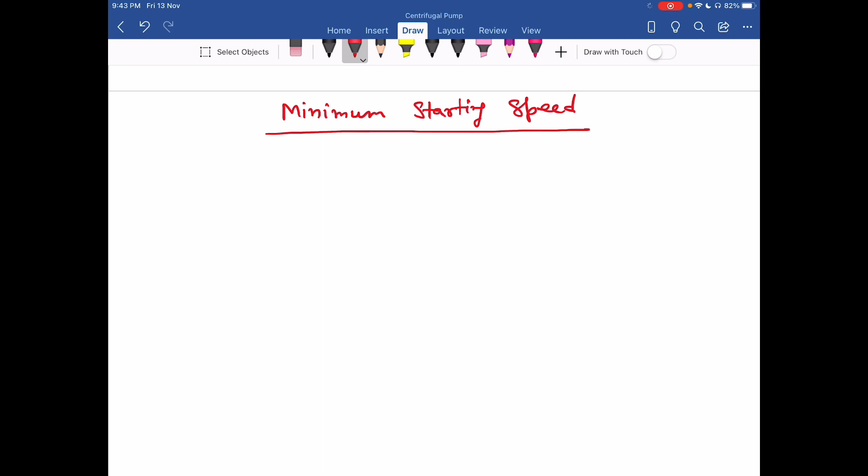Now, as a pump is started, it does not deliver water until enough head is developed to raise the water to the desired height. So, according to Euler's equation, the energy transfer per unit mass we can write as Euler's head, that is the energy transfer per unit weight.

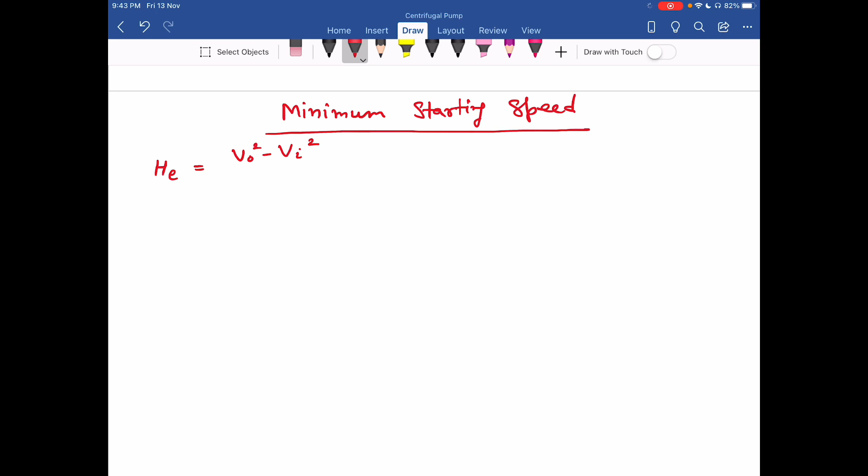So we can write it as VO square minus VI square divided by 2G, plus UO square minus UI square divided by 2G, plus VRI square minus VRO square divided by 2G.

Now, till the pump starts delivering water, there is no flow from the eye towards the periphery. So at that time, when we start the pump, the velocities of flow, the fluid velocities are zero. Only the centrifugal head is applied on the liquid. So the flow will start as soon as that centrifugal head developed becomes equal to the total head.

So now when we start the pump, there are no velocities, meaning this head is not there, this head is not there. Only the centrifugal head is available. So when we start the pump, the Euler head developed is only UO square minus UI square divided by 2G.

So the minimum head required, if it is H, then I can write this UO square minus UI square divided by 2G equal to H upon hydraulic efficiency.

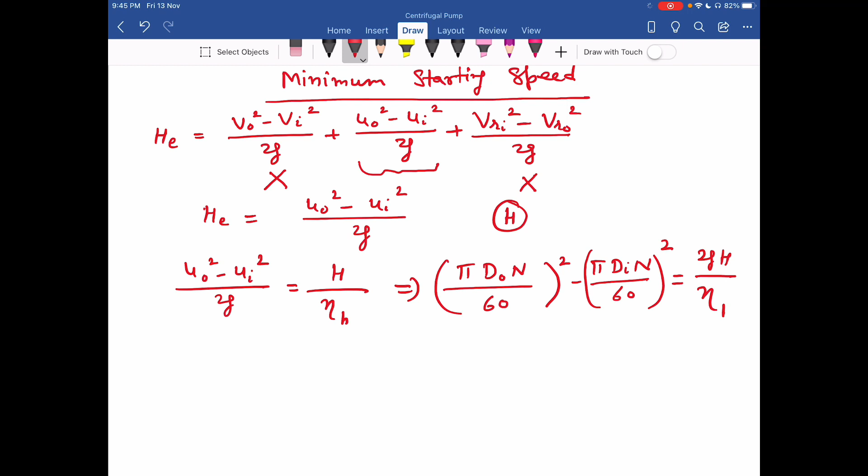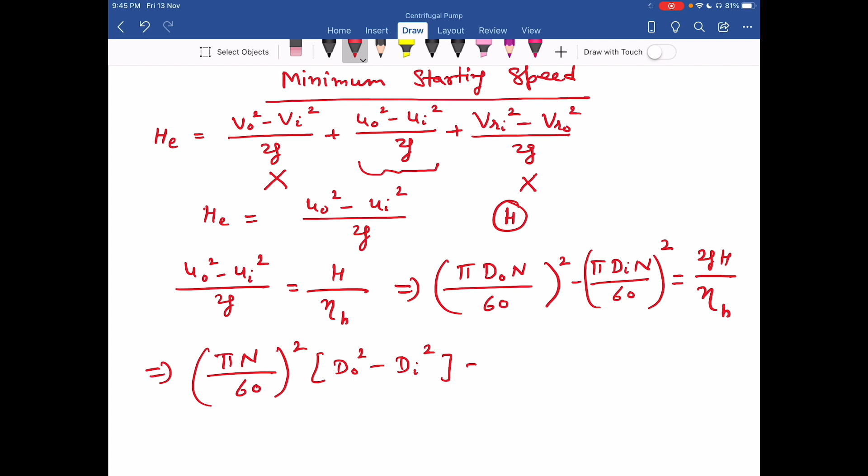Now further from here I can write pi n upon 60 square into dO square minus DI square equal to 2GH divided by hydraulic efficiency.

Now further from this formula I can write N minimum, that is the minimum speed of the pump to develop a head H, that is equal to 60 divided by pi, times square root of 2GH divided by hydraulic efficiency into dO square minus DI square.

Now this term is under root. So this is my formula to develop a minimum head of H with a minimum speed Nmin. So this is the formula for minimum starting speed to develop a head H.

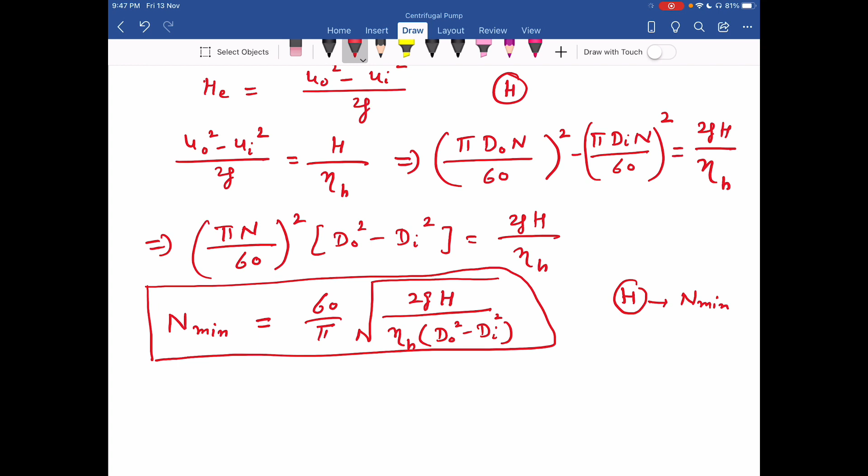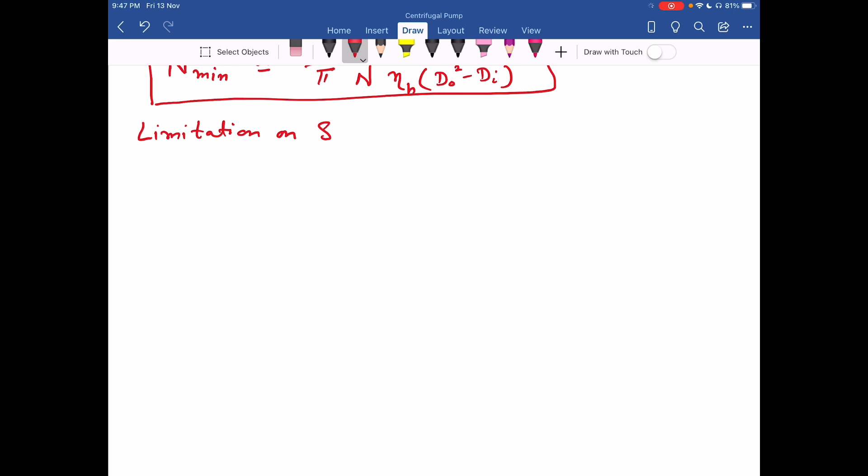Then next is the limitation on suction lift.

Now the suction or negative pressure is developed at the inlet of the centrifugal pump, that is at the eye of the impeller. So this suction pressure or negative pressure depends upon the height of the pump above the sump level. This is similar to the draft tube of a reaction turbine.

So when this absolute pressure is reduced to a value equal to the vapor pressure of the liquid, that is water, at room temperature, the water starts evaporating. The bubbles start forming.

So when these bubbles reach the region of high pressure, they collapse over there and a vacuum is created. When they collapse at a certain location, a high pressure wave is created, which strikes the surface of the vanes or the casing, producing pits or cavities on the vanes. So this whole process is called cavitation.

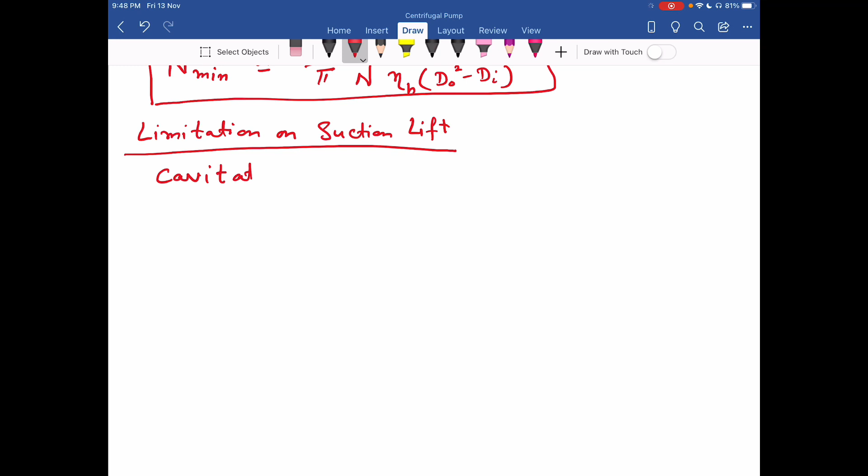This is called cavitation. Now we have to avoid this cavitation in the centrifugal pump. Therefore, it is necessary that the pump is fitted at such a height that the absolute pressure or negative pressure at the eye of the impeller does not fall below the vapor pressure of the liquid.

So at the eye of the impeller, the pressure should be more than the vapor pressure of the liquid. At the least, it should be equal to the vapor pressure of the liquid.

So that is the maximum value of suction lift we can find out.

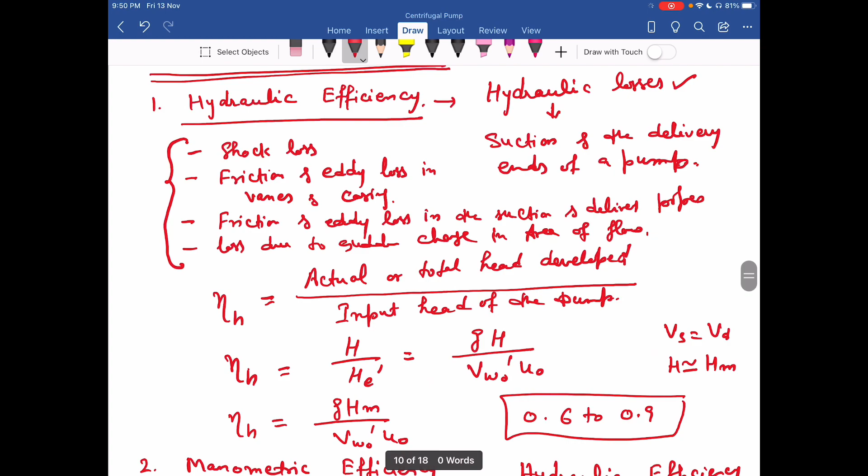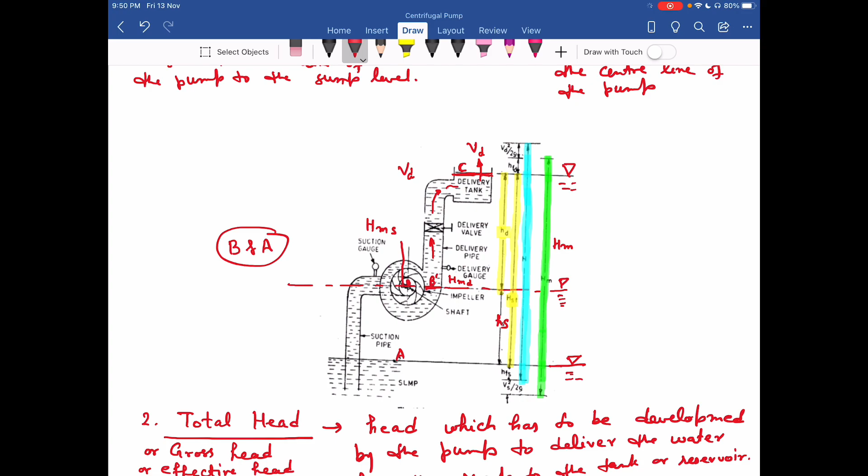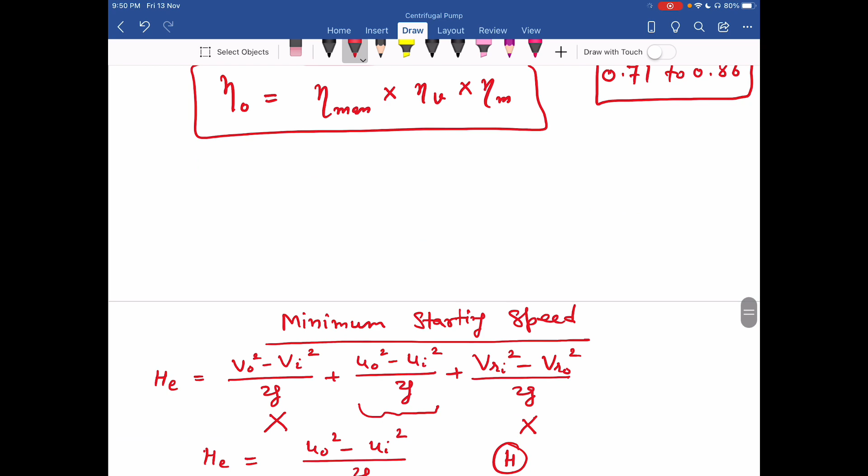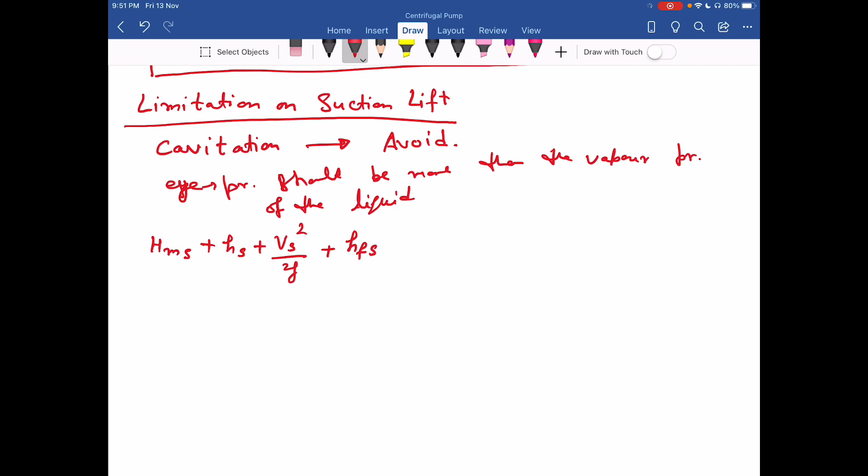So now if I try to apply Bernoulli's theorem at these two sections, at section B I can write the pressure head, that is HMS plus HS plus Vs square divided by 2G plus the frictional loss in the suction pipe. This is equal to PA divided by W or rho G plus the elevation head, that is the datum, plus the velocity head, that is 0.

Now this HMS I can write as pressure on suction side divided by W. Now this value of PS should not fall below the vapor pressure of water, that is PV.

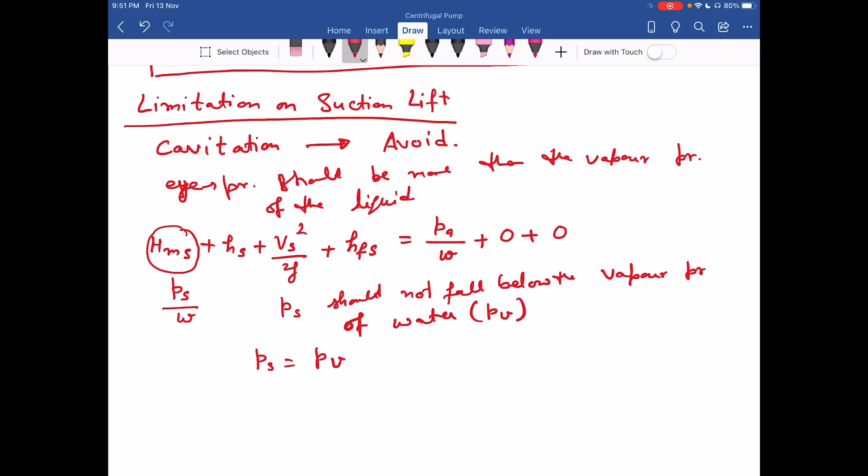So at the least this value should be equal to PV. So now I put this value of PS over here, so I can write PV divided by W plus HS plus Vs square divided by 2G plus HFS equal to PA divided by rho G.

So from here I can find out HS, that is equal to PA divided by rho G or W, minus PV divided by rho G, minus Vs square divided by 2G, minus HFS. These two signs are minus.

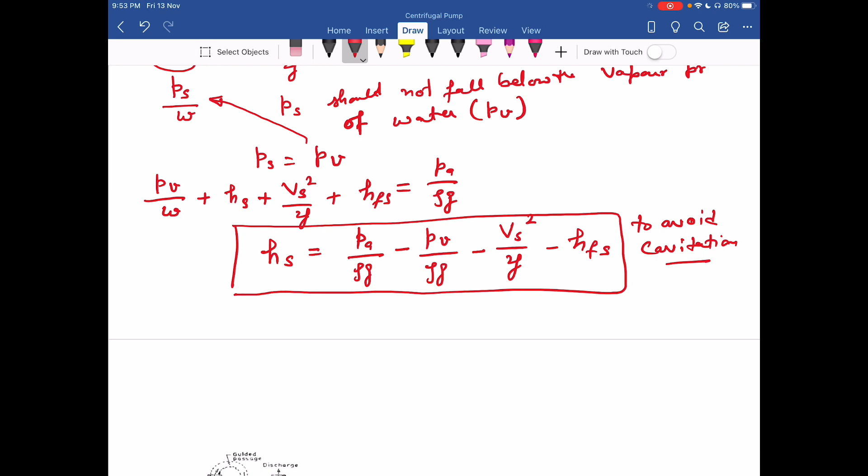Okay, so the suction height should not be more than this value of HS. I repeat it again: the suction height should not be more than this value of HS to avoid cavitation. At or above this value of HS, there is a problem of cavitation in the centrifugal pump. So this is the maximum value of HS to avoid cavitation. That puts the limitation on suction lift, that is the suction head. This is how we can decide the suction lift, or the suction head, you can say.

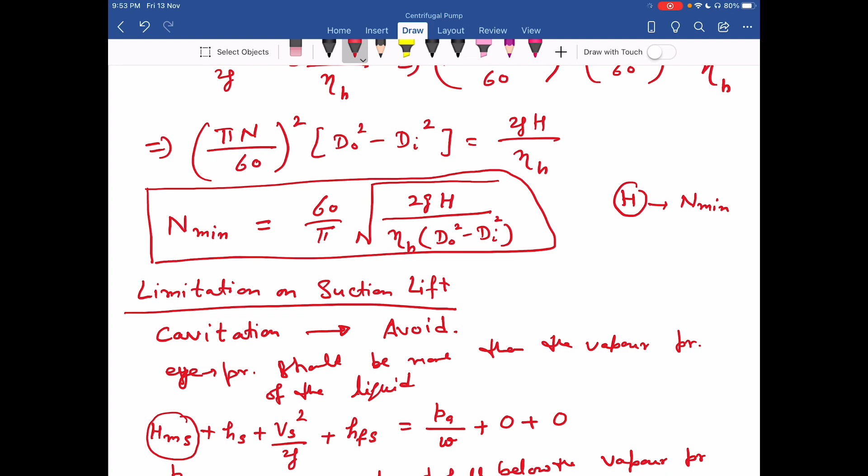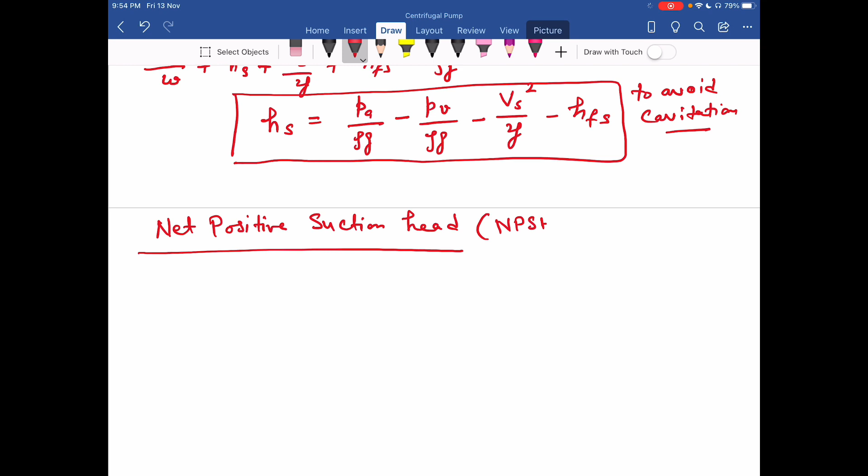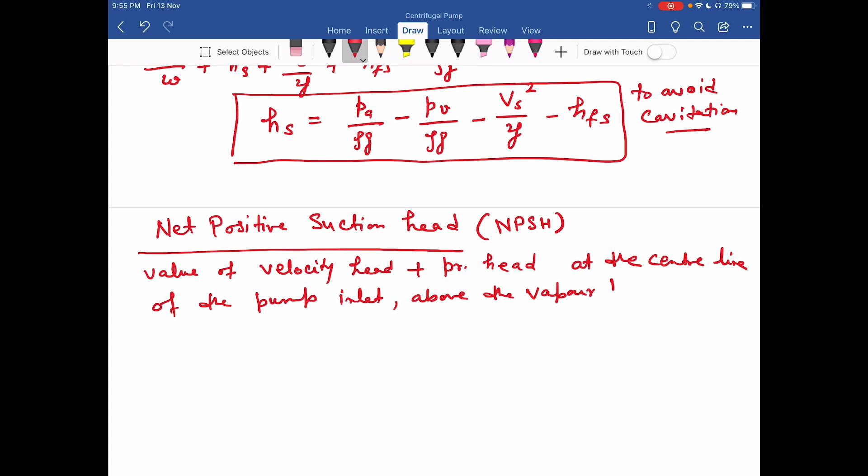Net positive suction head, that is NPSH. The net positive suction head is defined as the value of velocity head plus the pressure head at the center line of the pump inlet above the vapor pressure head of the liquid. So NPSH is the value of velocity head plus pressure head above the vapor pressure head of the liquid.

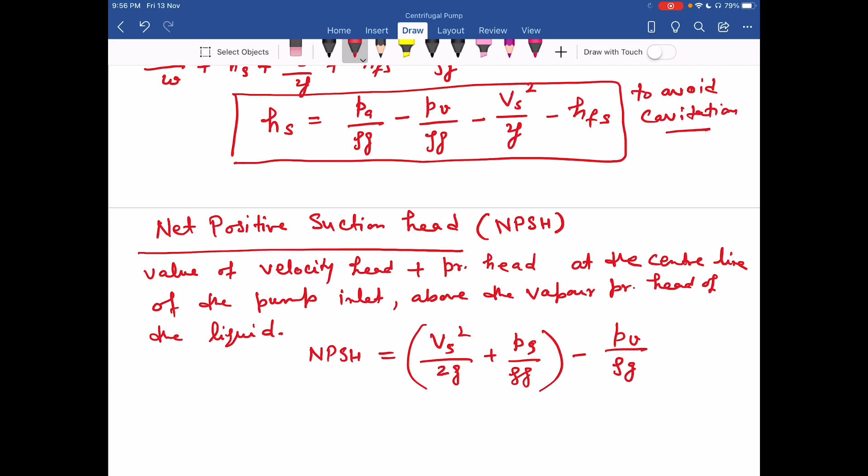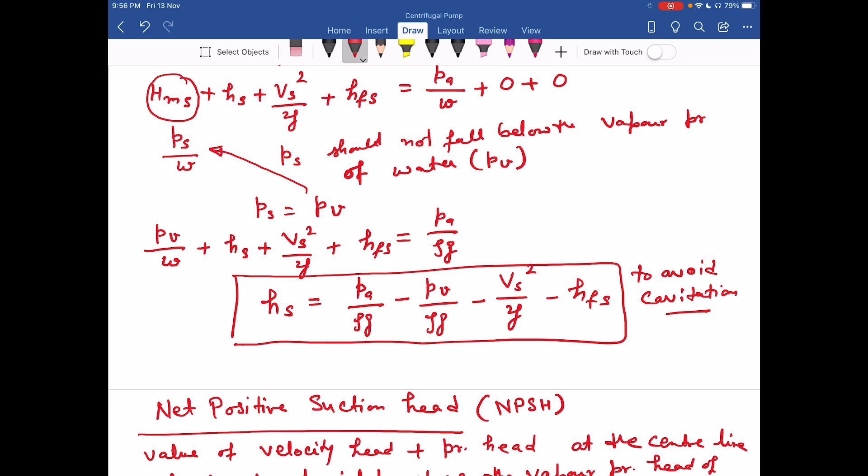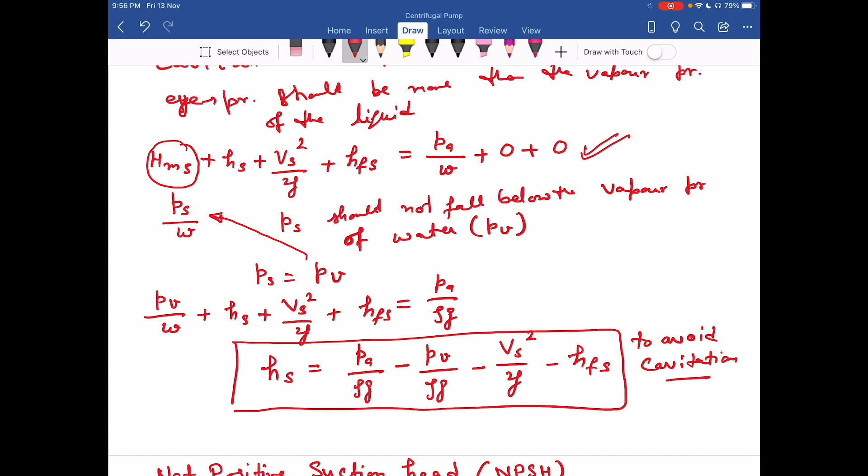Now I can write this as NPSH equal to Vs square divided by 2g plus Ps divided by rho g minus Pv divided by rho g. So this difference is NPSH. Now you can also see from the above equation that from this equation I can write Ps by W, that is rho g, equal to Pa by W minus Hs minus Vs square divided by 2g minus Hfs. So Ps divided by rho g is equal to Pa divided by rho g minus Hs minus Vs square divided by 2g minus Hfs.

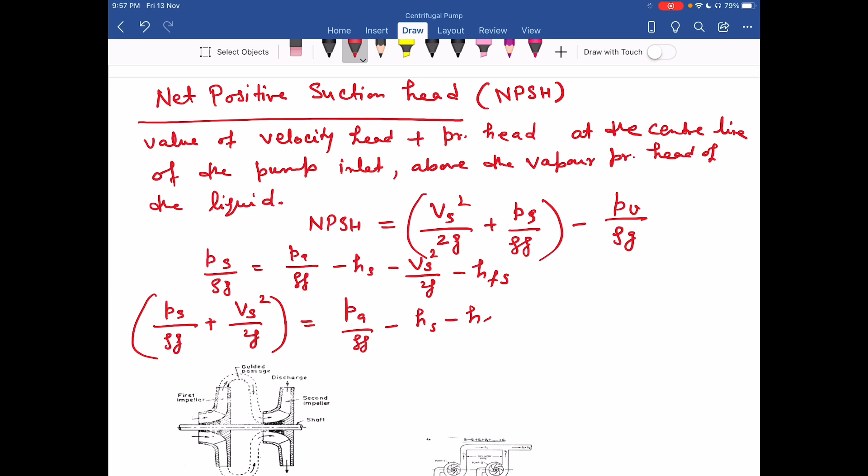Now from here you can find out Ps divided by rho g plus Vs square divided by 2g equal to Pa by rho g minus Hs minus Hfs. Now you subtract Pv by rho g from both sides. So I can write Ps divided by rho g plus Vs square divided by 2g minus Pv by rho g equal to Pa by rho g minus Hs minus Hfs minus Pv by rho g. So this term is my NPSH. This is another formula for net positive suction head.

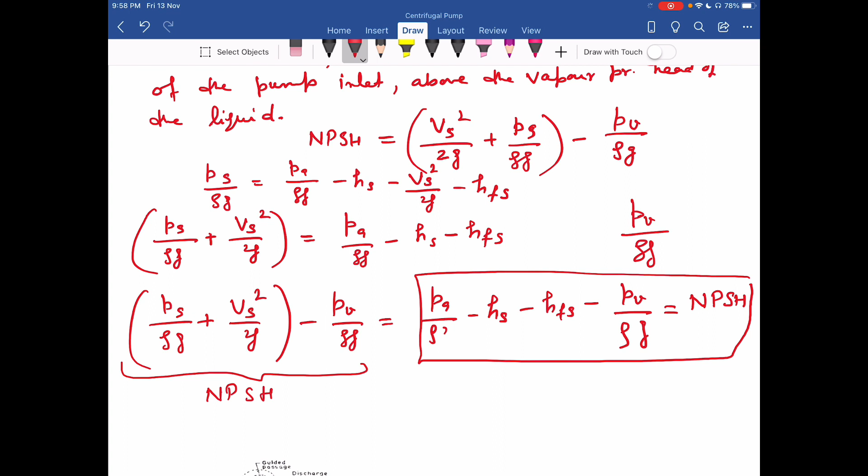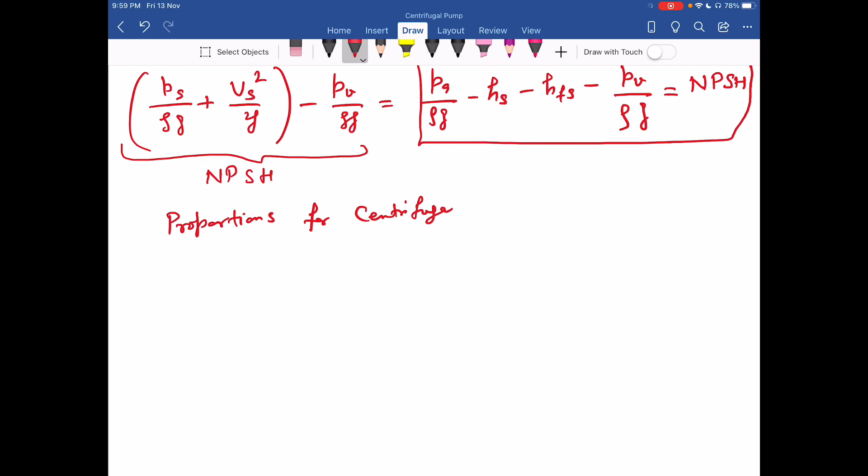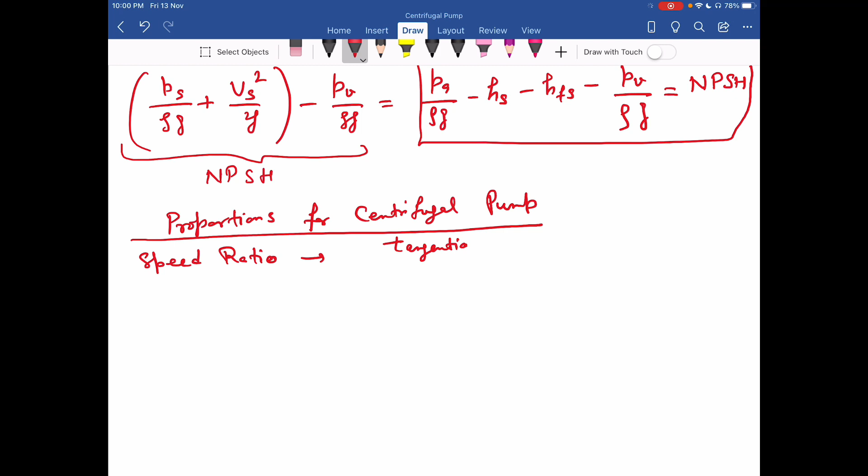Proportions for centrifugal pump. So first is the speed ratio. It is the ratio of tangential velocity of impeller at outlet to the quantity under root of 2gH. So I can write this speed ratio is equal to Uo divided by under root of 2gH. This is the speed ratio for centrifugal pump, and its value lies between 0.95 to 1.25.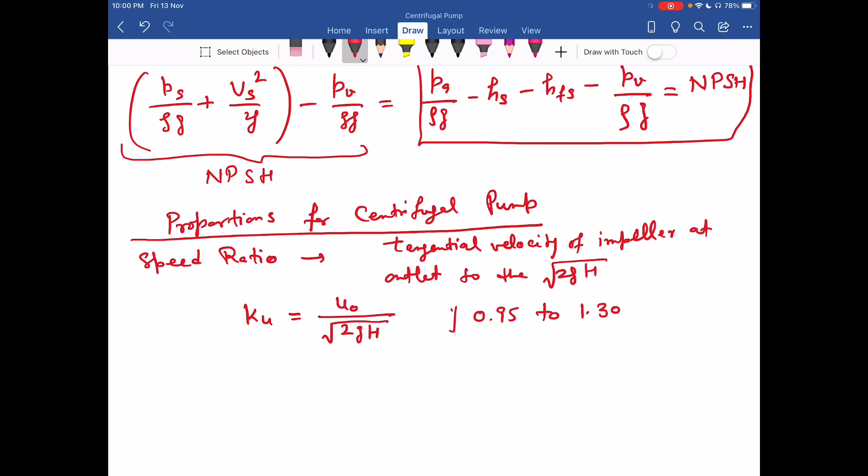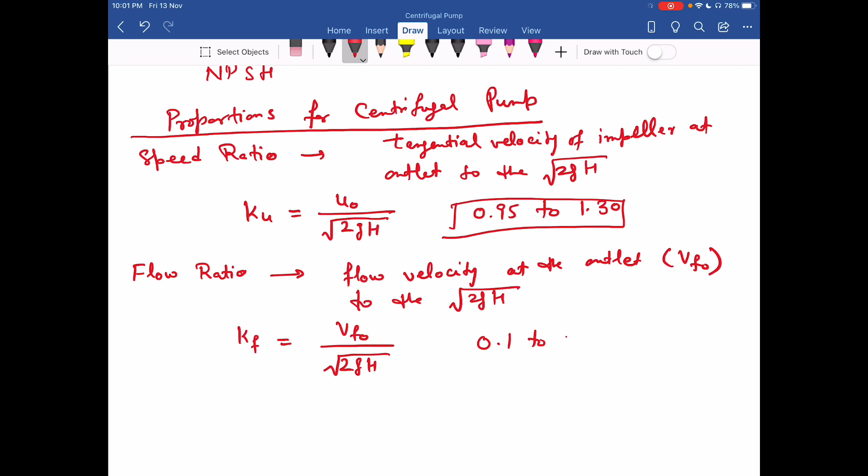Then the next term is flow ratio. It is the ratio of flow velocity at outlet, that is Vfo, to the quantity under root of 2gH. So I can write Kf equal to Vfo divided by under root of 2gH. This is flow ratio. Its value lies between 0.1 to 0.25 for centrifugal pump. Another is the pressure coefficient, that is Cp, that is 2gH divided by Uo square. This is also equal to 1 divided by Ku square. That is another coefficient.

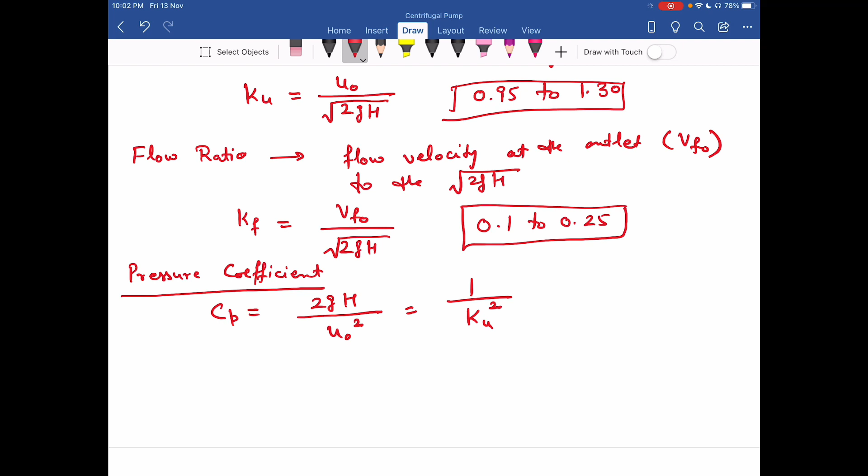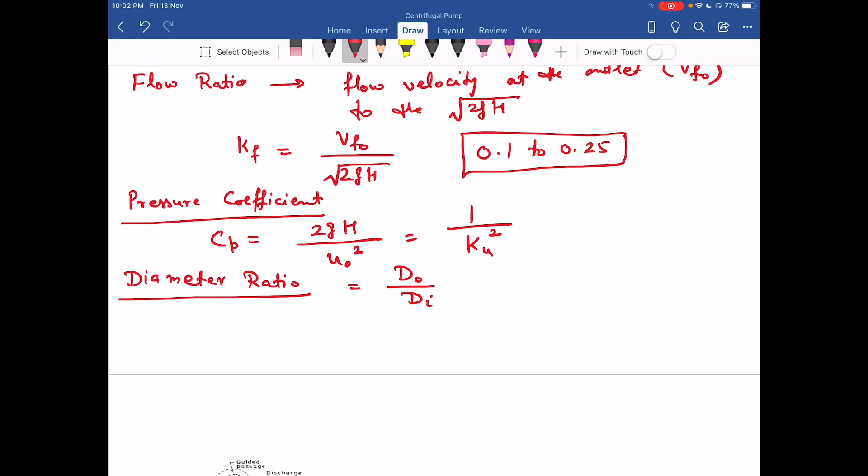There is one ratio that is called diameter ratio, that is Do divided by Di, the ratio of outer diameter of the impeller to the inner diameter. So that is diameter ratio. Then vane angle at outlet. For best efficiency, the value of outlet vane angle, that is beta O, is from 20 degrees to 30 degrees, and on average you can say this value is 25 degrees. And then the number of vanes. Normally in a centrifugal pump, the number of vanes lies between 6 to 8. So these are some important proportions for centrifugal pump.

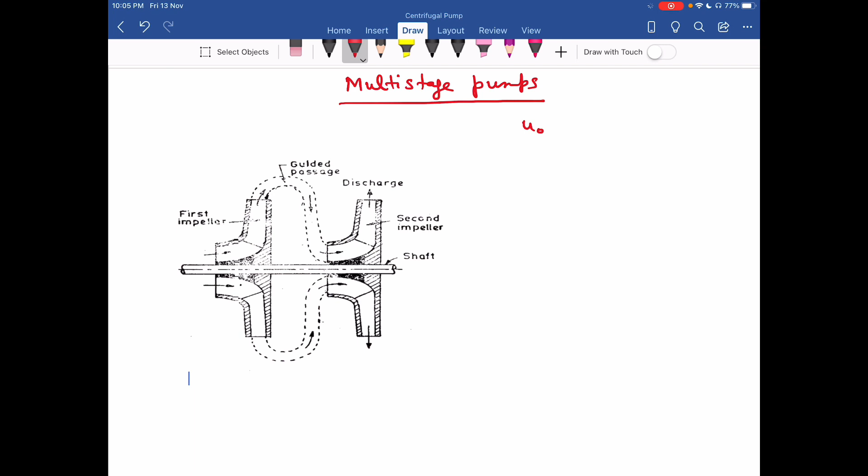So the discharge of one impeller or one pump, when we supply that to another pump, in between these two pumps or impellers, we have to properly guide that water to the inlet of the next one. So to guide that water in between, we use a row of guide vanes.

So we have two different impellers. In between these two impellers, there is one row of guide blades. That whole system we enclose in a casing, and that becomes a multi-stage pump.

So when water enters the one impeller, there is increase in kinetic energy as well as pressure energy of the water. After that, that high energy water goes to the guide vanes. In the guide vanes, the kinetic energy is reduced, and that is converted into further enhancement of the pressure energy. So when the liquid or water is coming out from the guide vanes, it has high pressure energy as compared to before, but lower kinetic energy.

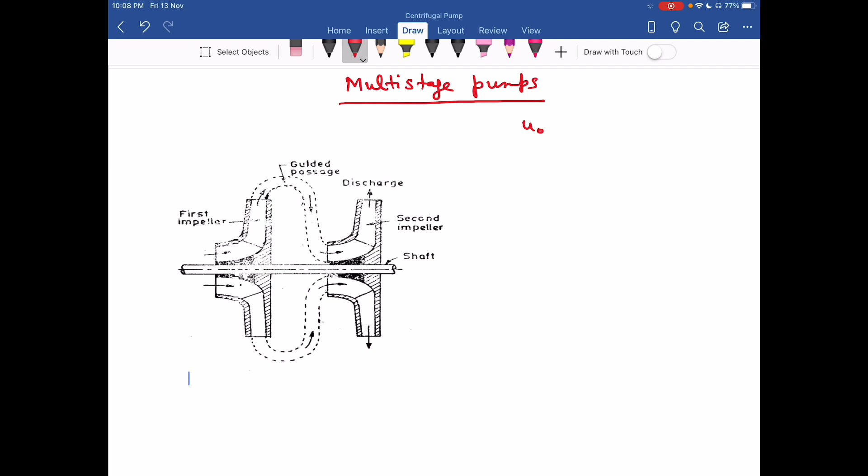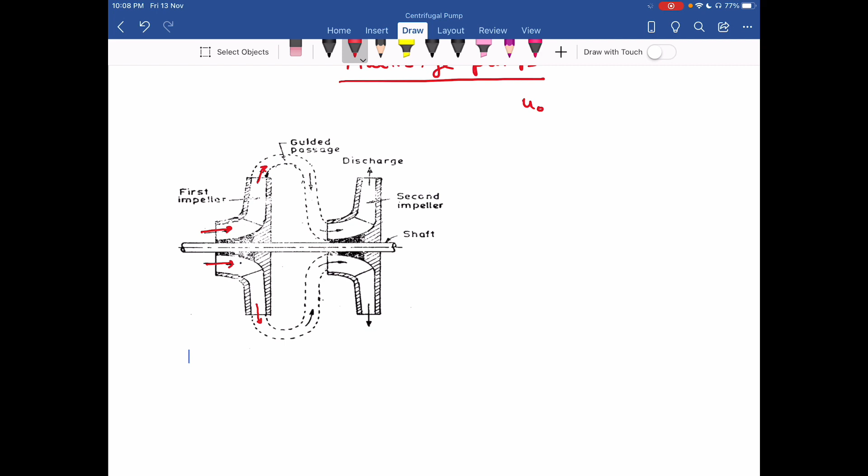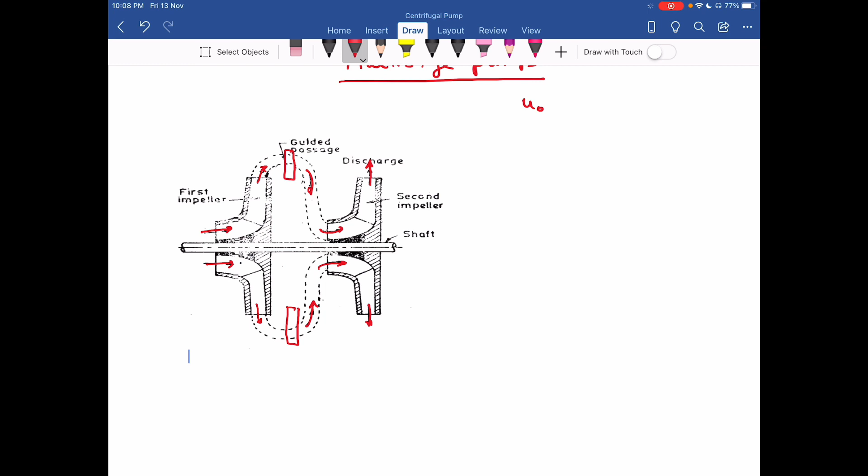Now you can also see in this diagram, we have the first impeller over here. Water enters from this side, comes out from the impeller, then it goes to the guide vanes. Here is the row of guide vanes. After guide vanes, it goes to the eye of the next impeller, and then it again comes out from the second impeller. So this is how two different impellers and one row of guide blades are mounted on a single shaft in case of a multi-stage pump.

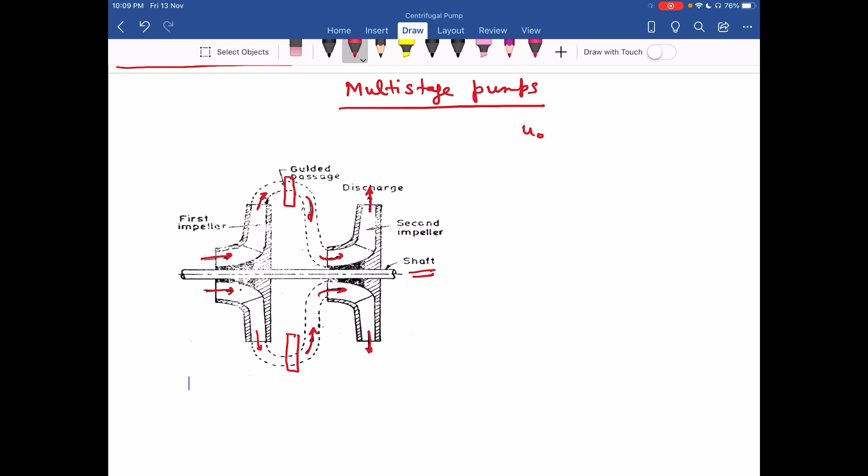So when we talk about the energy transfer, see this diagram. In this diagram, I have the first impeller, and this is my shaft. So this is my first impeller, then the guide blades, then second impeller, and then casing or maybe another row of guide vanes.

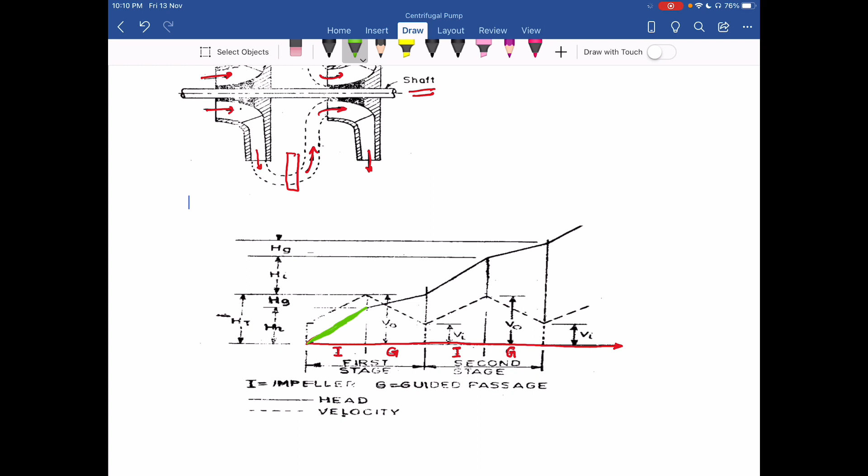So when water enters the impeller, the first impeller, see here, when water enters the impeller, its pressure energy increases. That means its pressure head increases as well as kinetic energy or kinetic head increases.

So when it passes through the guide vanes, you can see what happens. There is further increase in pressure head, at the loss of kinetic head.

So in the guide vanes, there is a diffuser. There is an increase in cross-sectional area within the guide vanes, so that reduces the velocity, and that reduction is converted into high pressure head.

And then again water enters the next impeller. So when it goes to the next impeller, again there is a rise of pressure head and there is a rise of kinetic head.

Then water goes to another row of guide vanes or a casing. Again there is increase in pressure head and there is a reduction in kinetic head.

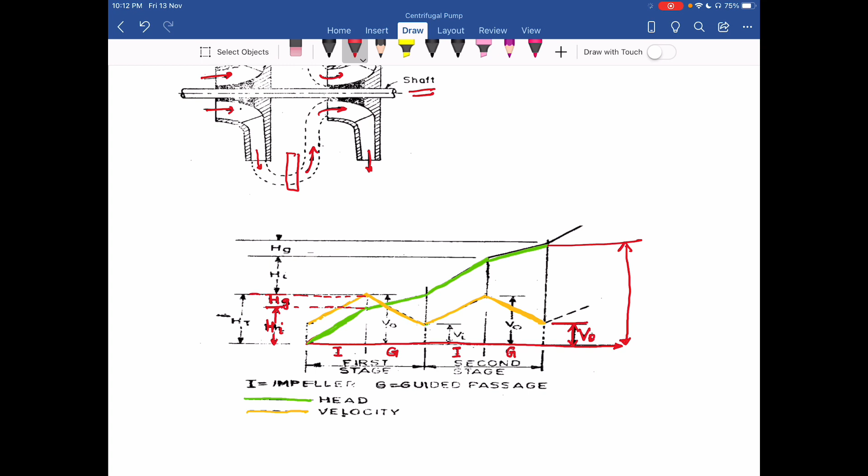So you can see also in the diagram, this is my HI, the head rise in the impeller. This is HG, the head rise in the guide vanes, up to here. So this is my one stage, and this is my head generated in one stage.

Then in the second stage, this is my HI, head increase in the impeller, from here, and in the guide blades up to here. So this is my another HT, head gain in second stage. So here the total head gain is 2 times HT.

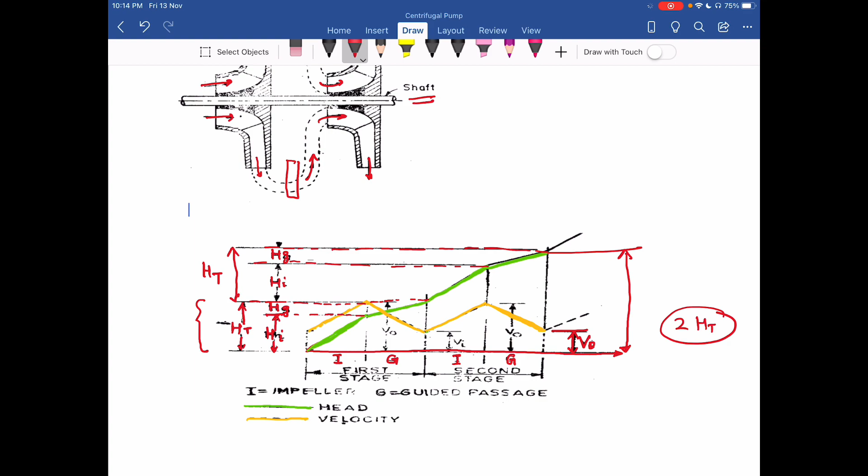So this is my multi-stage pump. So in case of multi-stage pump, now you can write the total head gain.

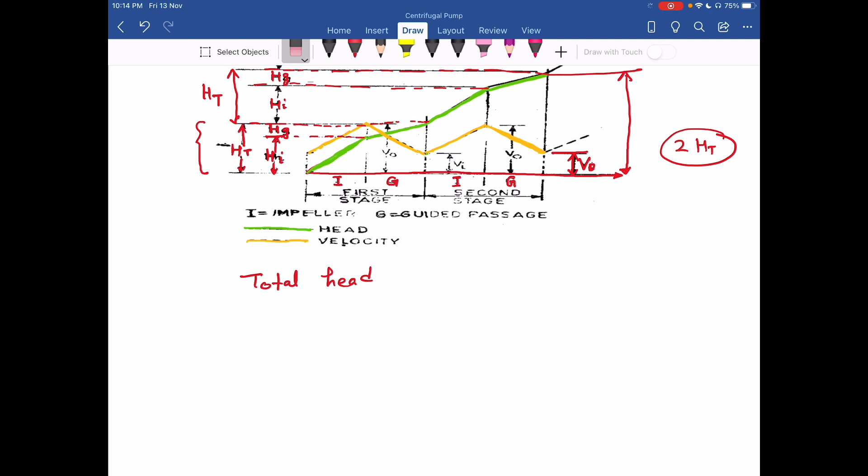Or you can say total head developed is equal to n times Hi plus Hg, where n is the number of stages or the number of impellers. So I can write this as n times Ht, where Ht is the total head rise in one stage. Hi is the pressure head rise in one impeller, and Hg is the pressure head rise in guide vanes. So this is how I can find the total head developed in multi-stage pumps.

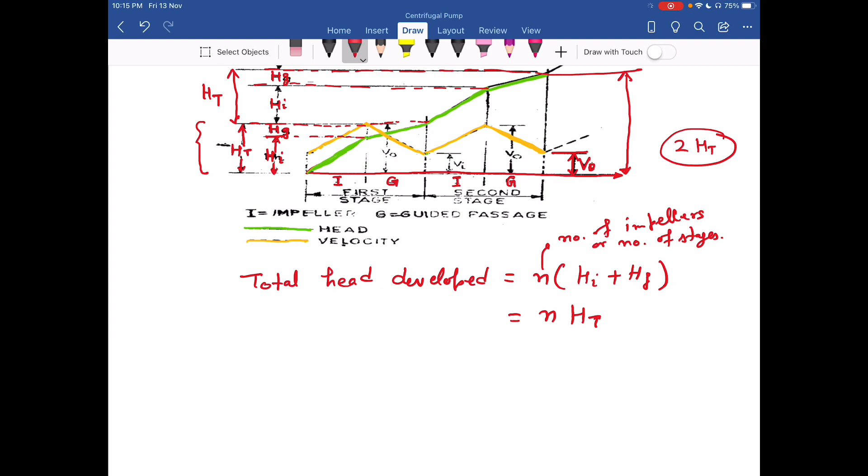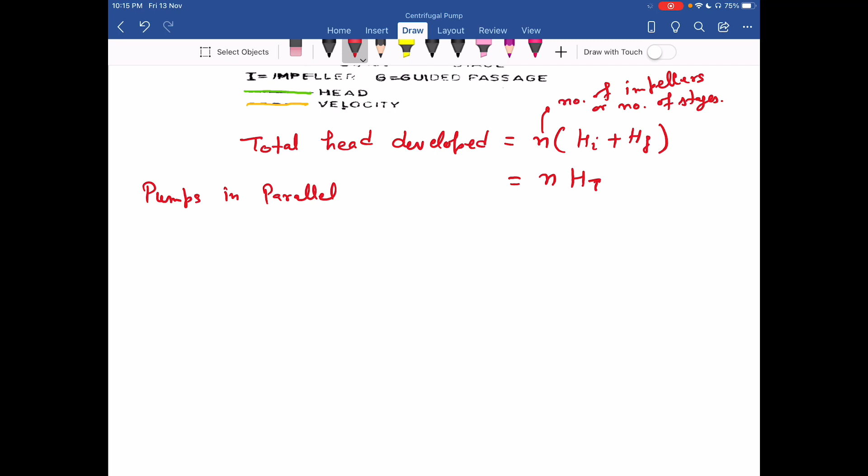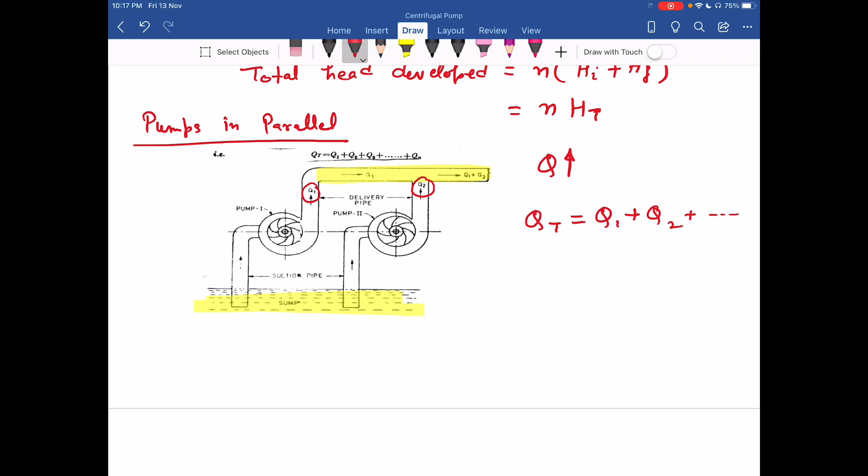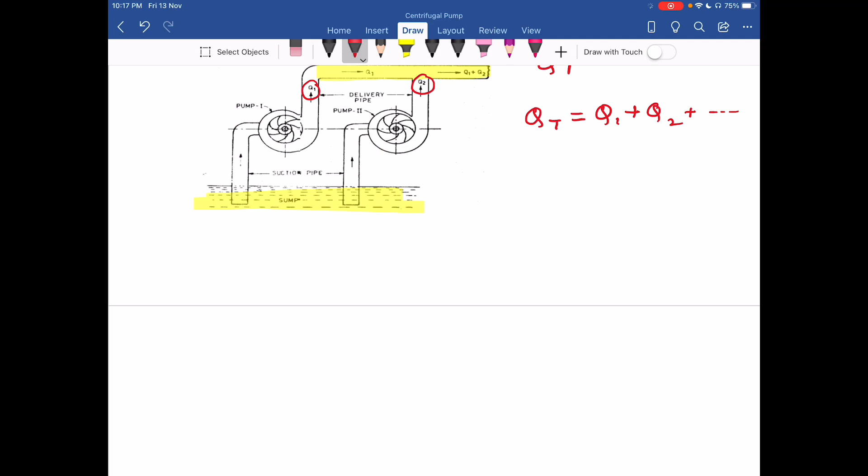Then next is the specific speed of a pump. As in case of a turbine, the specific speed of a pump is used to compare the performance of different types of pumps. Similar to turbines, we have a concept of specific speed in pumps also, and it is used to compare the performance of different types of pumps.

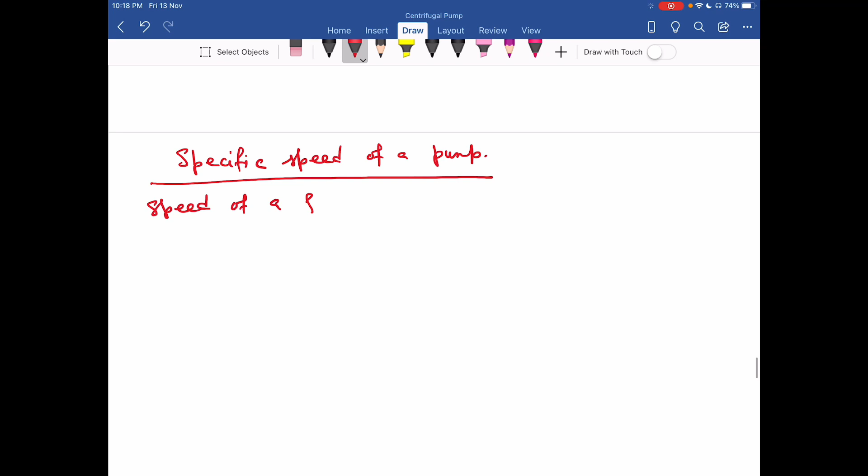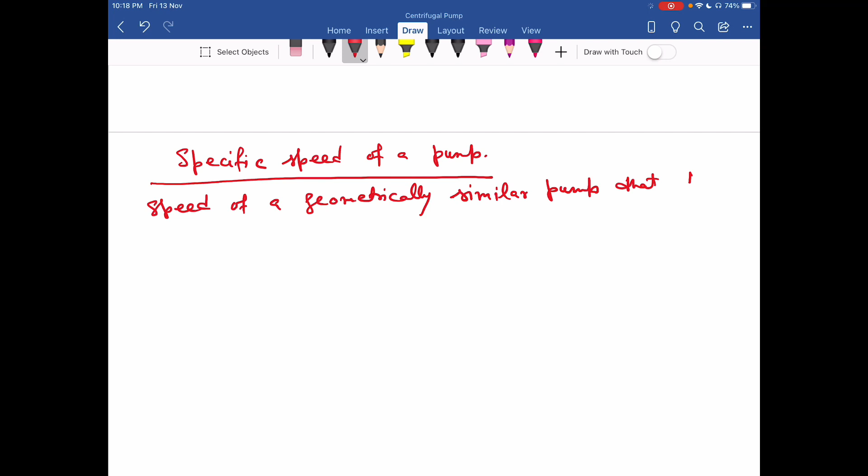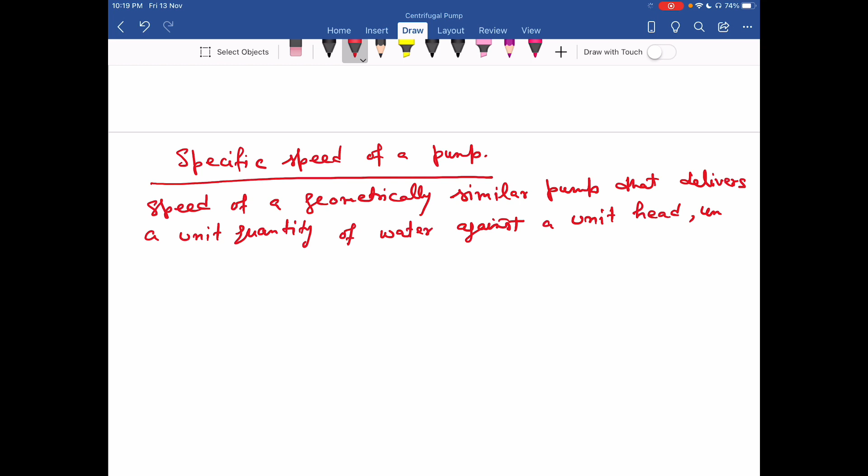Specific speed of a centrifugal pump is defined as the speed of a geometrically similar pump that delivers a unit quantity of water against a unit head, under corresponding conditions of working, that is, similar conditions of working. So here we have the unit discharge against the unit head. That is the specific speed of a pump. Now I am going to derive this formula for the specific speed of a pump.

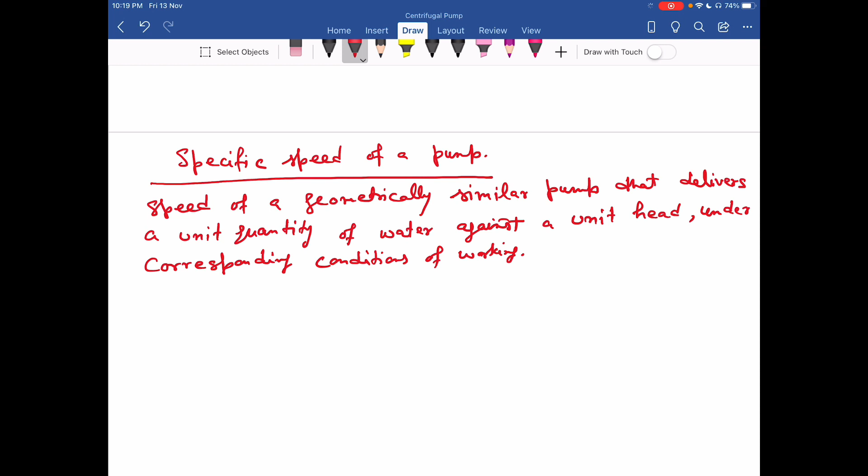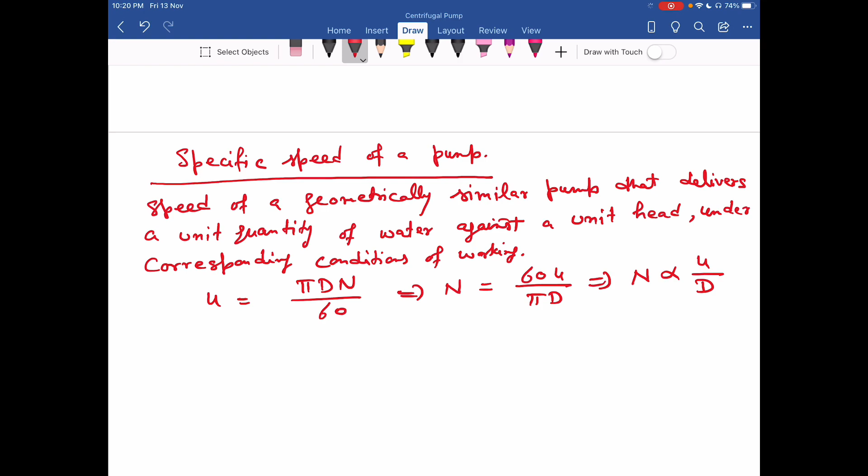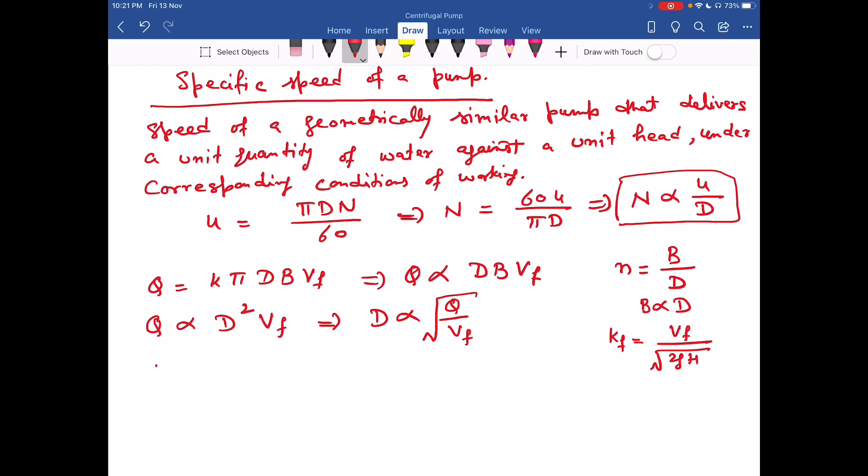From here I can write D is proportional to under root of Q upon Vf. Now further I have the flow ratio, that is Vf divided by under root of 2gh. So I can write D again is proportional to Q upon Kf under root of 2gh, this further in under root. So this I can write as D is proportional to, when I solve this, Q divided by h raised to power 1 by 2, within the under root.

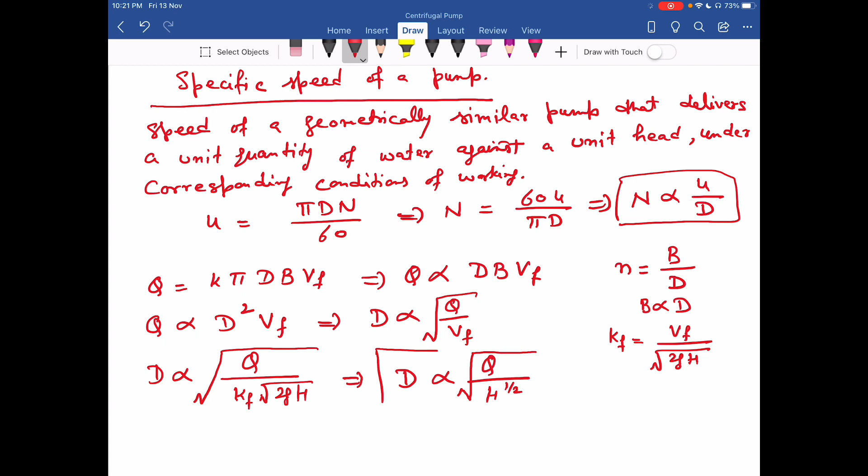Then next I have one more formula for Ku, that is U upon under root of 2gh. So from here I can write U as Ku under root of 2gh, and further U is proportional to, since Ku is constant and 2g is constant, proportional to under root of h.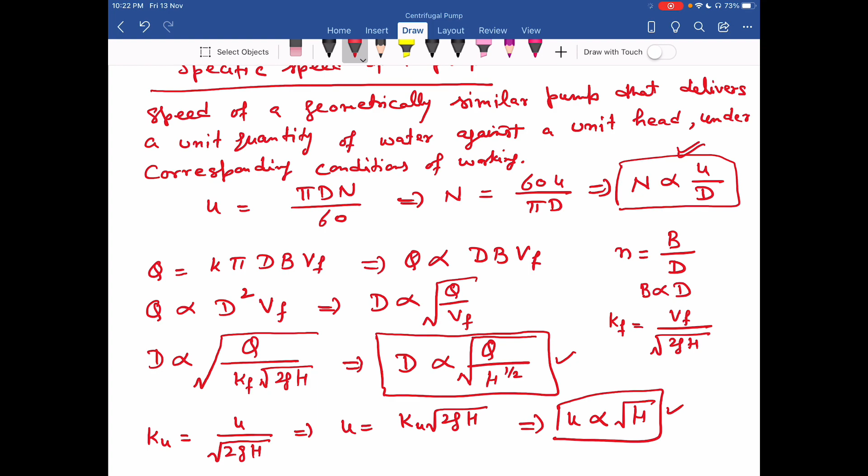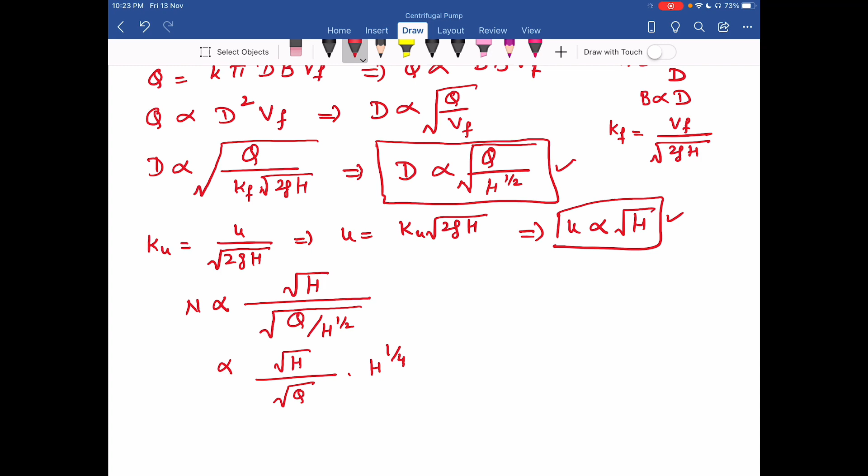Now I use these two values of D and U, put them into the formula of n. So now I can write n is proportional to under root of h divided by Q upon h raised to power 1 by 2 under root. This is further proportional to under root of h divided by under root of q into h raised to power 1 by 4. Further I can write it as h raised to power 3 by 4 divided by under root of q. Now further, n equals the constant of proportionality, c, times h raised to power 3 by 4 under root of q, where c is constant, the constant of proportionality.

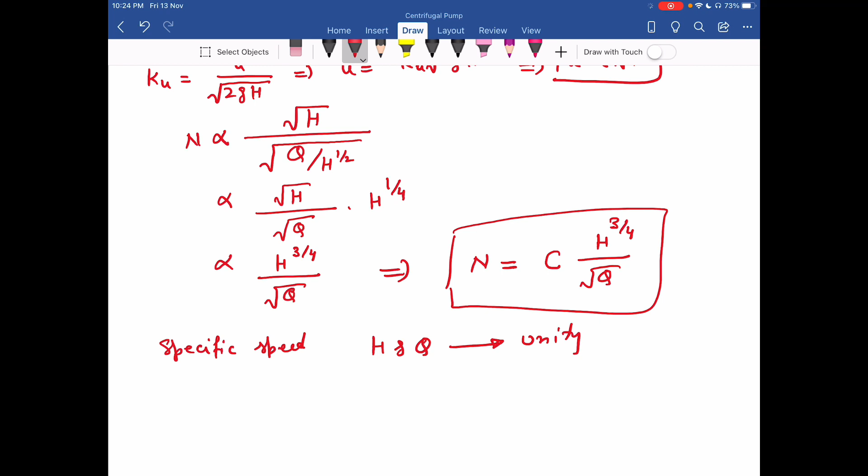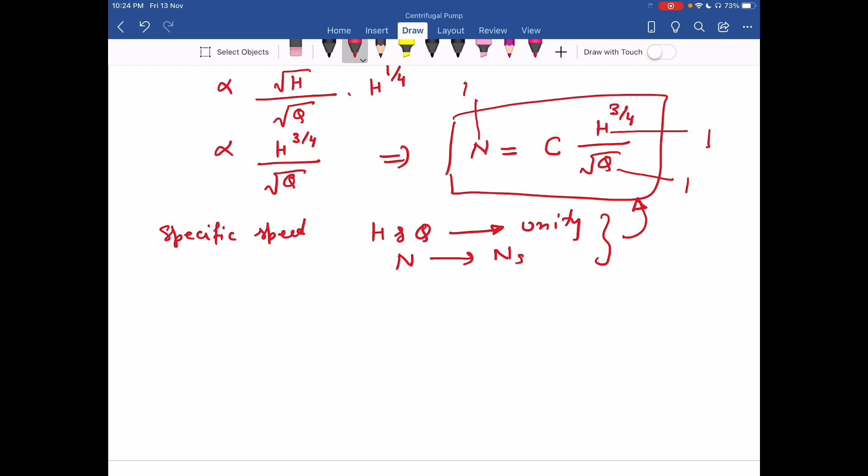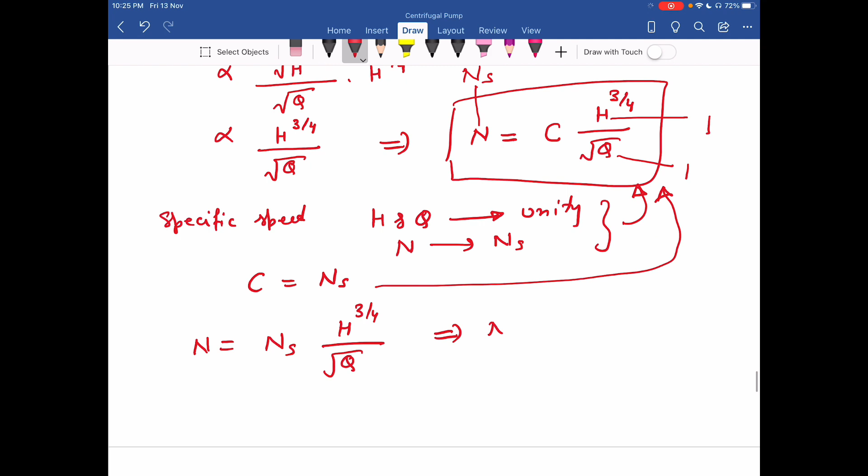Now I use here the definition of specific speed. According to that definition, when h and q reduce to unity, my speed becomes equal to ns. So you can see in this formula, when h and q become 1, my n becomes equal to ns. That means the value of the constant is now equal to ns. So put this value of constant into the formula: n is equal to ns times h raised to power 3 by 4 under root of q. So now you can write ns is equal to n under root of q divided by h raised to power 3 by 4. So this is the formula for specific speed of a pump.